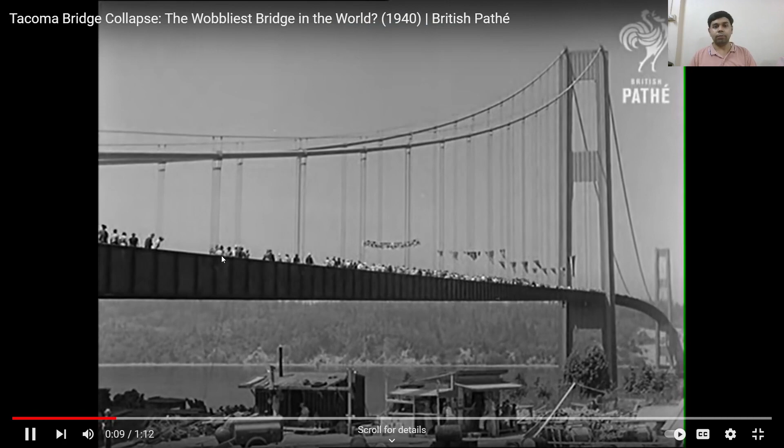Over $6 million. But misfortune overtakes the great structure. These are some of the most amazing pictures ever recorded by a newsreel. The actual collapse of the world's third largest suspension bridge.

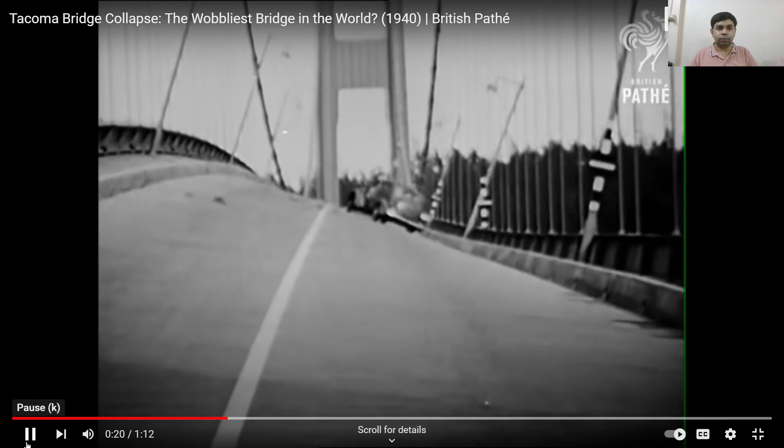So this video explains the Tacoma Bridge. It was one of the largest suspension bridges in the world, around 1940. This is a very old video. There were intense winds which caused the bridge to vibrate and wobble with uncontrolled amplitude. The frequency of the forces acting on the bridge matched the natural frequency of the bridge, and this led to uncontrolled oscillations of the bridge. You can see how large it was.

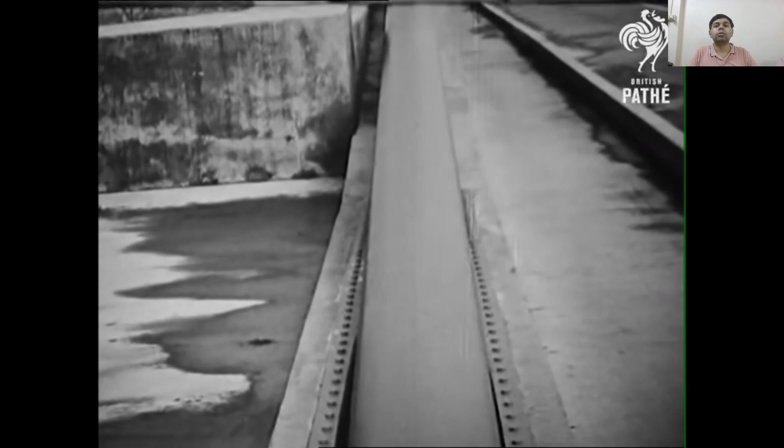Only a 35-mile-an-hour wind is blowing, but this apparently sets up a rhythmic swinging of the bridge, which increases with each swing.

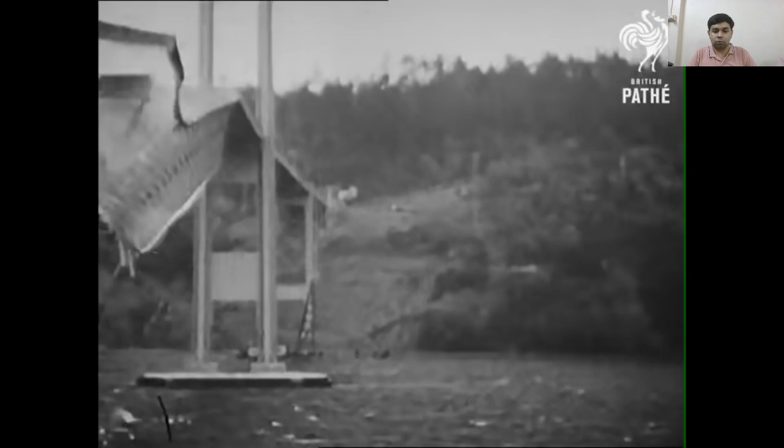Finally, the swinging road and the suspension cables give way and plunge into the water below. Fortunately, the only casualties were a car stalled on the bridge and a dog.

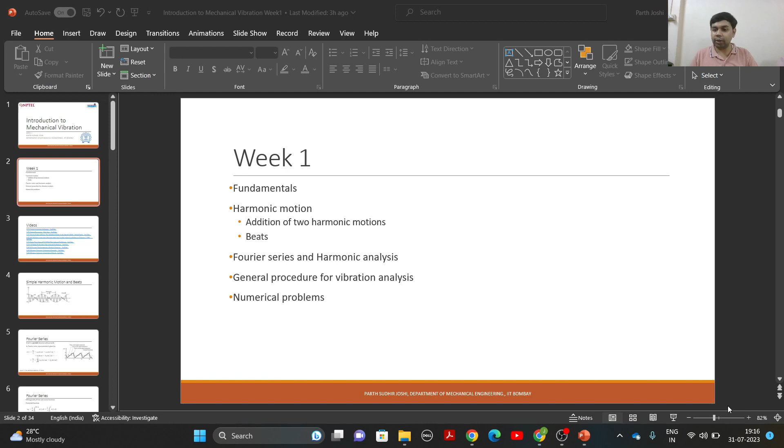So I think all of you were able to at least see the video, right? Yes, sir. Yes.

So the video basically showed how the Tacoma Narrows Bridge collapsed because of the gusts of wind. The video said that the wind was blowing at only 35 miles per hour, which is not a very high speed, but still the wind was enough to cause such uncontrolled oscillations of the bridge, and this finally led to the collapse of that bridge. So this is one of the very famous examples of how resonance can cause damage.

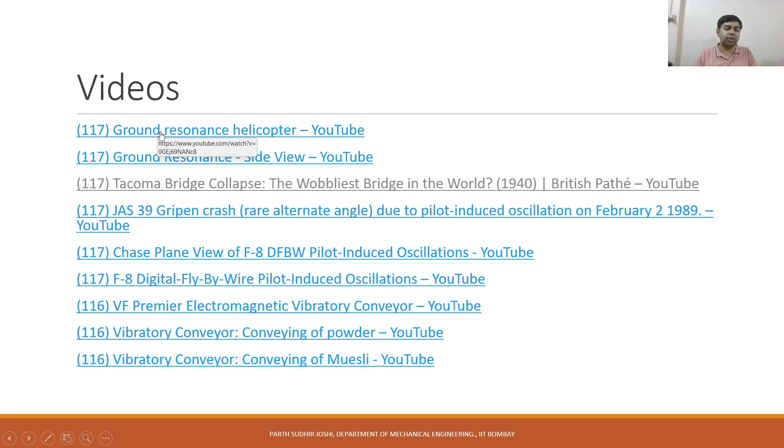Then I would like to show you another example, which is called helicopter ground resonance. So what happens here is there is some eccentricity in the helicopter rotor which leads to a resonance occurring, and we'll see what happens to the helicopter in the video.

So I think all of you could see how the helicopter rotor broke off. So what happened is that it had some kind of eccentricity in the rotor which made an excitation force on the helicopter rotor.

So basically the four blades of the rotor are kind of flexible and they can move about here and there, and if one of the blades deflects slightly because of some wind or some kind of effect, then that causes some eccentric load which acts on the rotor, and then eventually that excitation goes on increasing to such an extent that the rotor can actually break off. So we'll see the same example, I'll just play it again, but this is the side view.

So basically these are also some kind of oscillations which are not desirable. So we'll see another example of a similar kind where we see pilot induced oscillations. So the plane was trying to land, but the controls given by the pilot actually led to some excess pitching up motion, which caused the plane to take off again, even though it was trying to land. So this is another example of pilot-induced oscillations.

So we see that in some cases the oscillations in a system are generally undesirable. So this video and the next video are again similar examples of fly-by-wire pilot-induced oscillations. So you can watch these videos later. I'll be sharing this entire set of slides with you.

So now we'll see another example where we see vibrations being used for some constructive purpose.

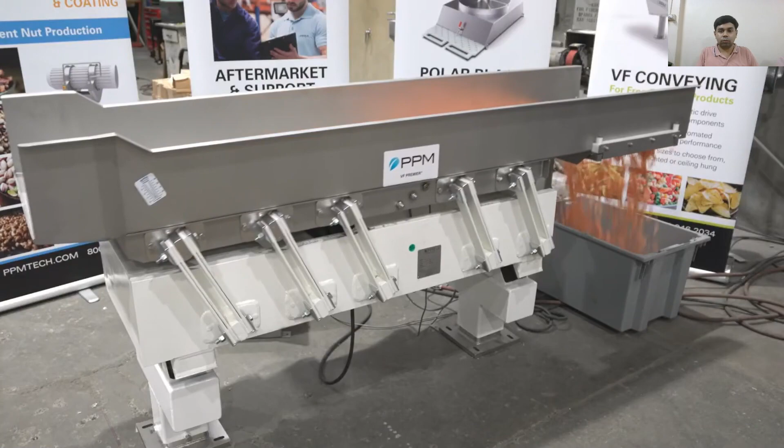So this was an example where we see an electromagnetic vibratory conveyor. So there are some oscillating electromagnetic forces which make the tray vibrate back and forth. And this causes back and forth vibrations because of the electromagnetic forces, and this pushes the things placed in the tray forward. So these vibrations cause the things the tray is carrying to be pushed forward. So this is basically used as a conveyor or feeder in some industries.

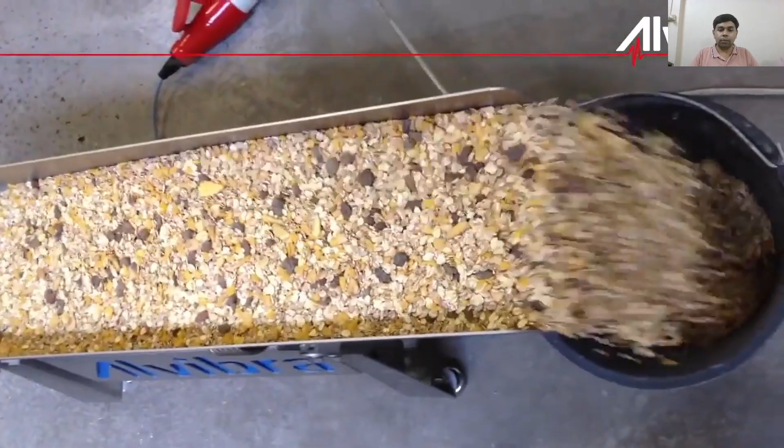So similarly, we can see another example where vibratory conveyors are used. So we can see the tray is vibrating at some very high frequency, so that pushes the things that the tray is carrying forward. So this is where we can see a useful application of vibrations. So these were some examples.

In addition to that, there are also many examples which you can see. You can search on YouTube for vibratory finishing processes, where vibrations are used for grinding or finishing operations in some industries. So there are several examples where vibrations are used in a useful way also.

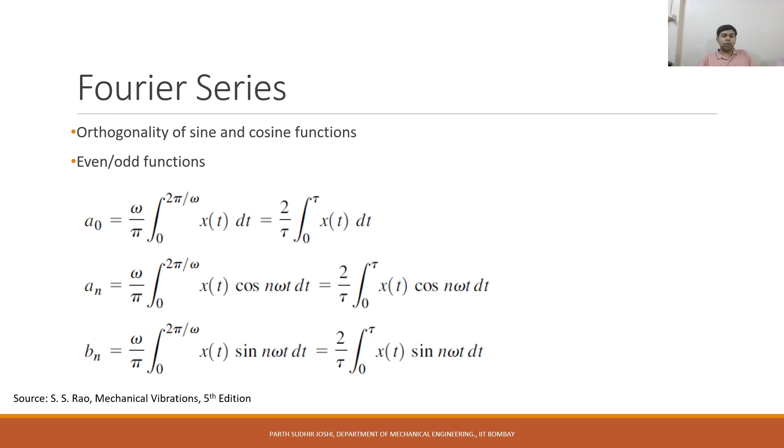Then we come to the general procedure for vibration analysis. The first major step is mathematical modeling. When we want to analyze the vibrations in a system, we first have to express the whole dynamics of the system using a mathematical model. We generally apply Newton's second law to the system, and even before that, we try to find out how much information we have about the system, and based on that, how detailed a model we can build.

Based on the level of information we have about our system, we can build either a simple or a more complex model, which may be linear or non-linear. The complexity of the model will depend on how much information we have and what our interest is. If our intention is just to see the natural frequency, we may not need a very detailed model to capture that characteristic. But if we want a precise response to some excitation, we may need a more detailed model, and for that we will need more data.

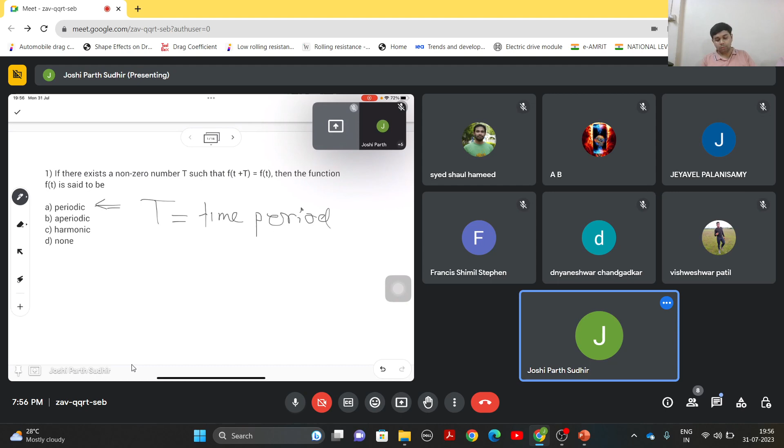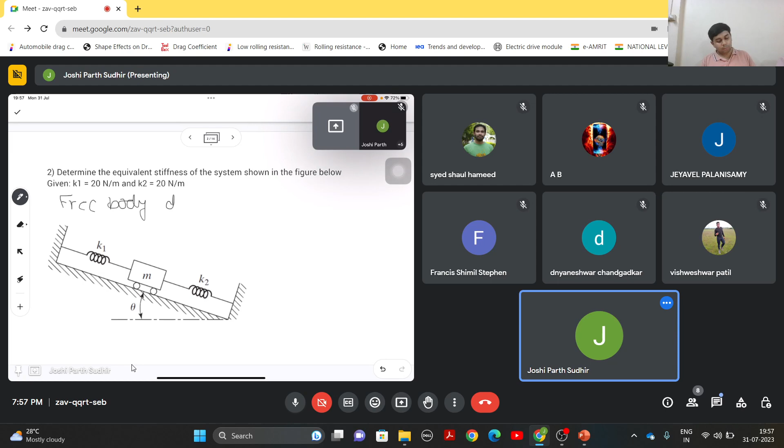Okay, so I'll give you a hint. Basically, we can just draw a free body diagram. One by K1 plus 1 by K2. Okay. Okay, we'll see whether that is the answer.

So if we draw a free body diagram and show the different forces acting on this mass m, we will first show the weight W of the mass, and there will be some normal reaction because of the inclined plane, and there will be some force due to the first spring. Let us say it is tensile. Now if the spring force due to K1 is tensile, then the spring K2 may be under compression, but for now let us assume that this is the direction of the spring force.

Let us say Fs2 is compressive, whereas the spring force Fs1 is tensile. So now if we want to write down the values of the spring forces Fs1 and Fs2 in terms of K1 and K2, we have to consider the displacement of this mass. So let us say the displacement of the mass is x of t.

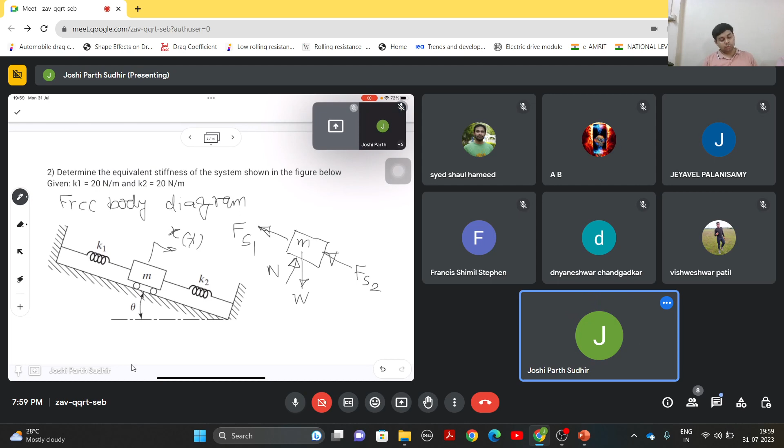Or if we attach a coordinate system over here, with the x-axis along this inclined plane, and this is the y-axis, then the x coordinate is basically the distance of this mass from this surface. So this is x, and so whatever is the displacement of this mass,

if this K1 spring is under some tension, the other spring is subjected to the same kind of compression. So let us say the deflection of spring K1 is delta 1 and the deflection of spring K2 is delta 2; it may be tension or compression. So what is the relation between delta 1 and delta 2? What will be the relation between delta 1 and delta 2?

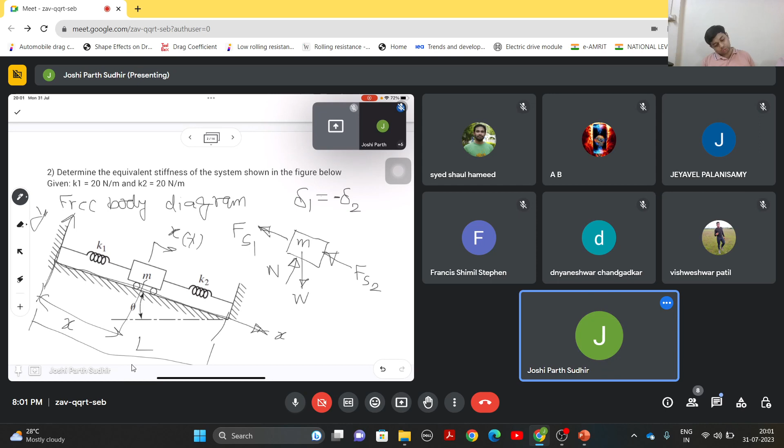Yeah, they will be of opposite signs. So if we call tension as positive and compression as negative, then yes, they will be of opposite signs. So if we have to write down the expressions for Fs1 and Fs2, let us say the distance between these two walls is capital L. Then this will be L minus x.

Right? So let us say the natural length of spring K1 is L1 and the natural length of spring 2 is small l2. Then we can write down the values of the deflections delta 1 and delta 2 using this expression.

Now, this problem as such is very simple for finding the equivalent stiffness, but the steps we are following are one of the most generalized, systematic ways to solve any problem in vibrations. The first step is to choose a coordinate system and attach it so that it is easy to write down the positions of the masses. Since we are dealing with an inclined plane, we can choose a coordinate system along and perpendicular to the inclined plane. That will be easier for us to deal with.

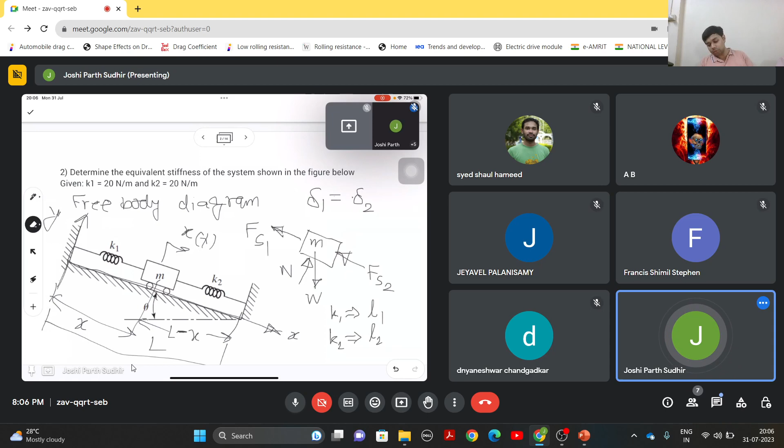Why? Because I have shown the direction in such a way that Fs2 is already compressive. So we don't need to say delta 1 is minus delta 2, because we have already assumed the nature of the forces while showing the direction. So either we assume both are tensile and then write delta 1 is minus delta 2, or we assume the nature while drawing the free body diagram, and then indicate the magnitude of the forces.

So either way, it will be the same thing. Since delta 1 is delta 2, they are equal in magnitude, so we can write basically K1 plus K2 into delta 1. It can be delta 1 or delta 2 because both are equal. This is basically K equivalent into total deflection, delta 1. So we can say that K equivalent is equal to K1 plus K2.

The springs are actually in parallel, so that's why the stiffnesses get added up. The K equivalent will be K1 plus K2, not 1 by K1 plus 1 by K2. They are not in series, they are in parallel, because the deflection values are the same and the forces get added up. Whereas in springs in series, the forces acting on the springs are equal and the deflections get added up to get a total equivalent deflection. There the equivalent spring stiffness is different.

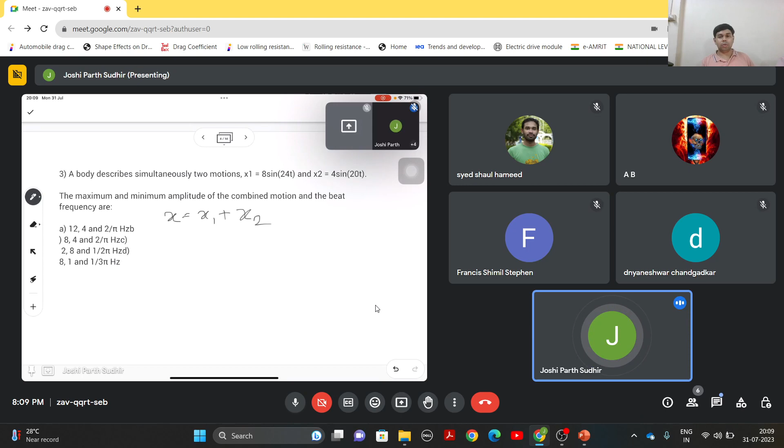Shaul Hameed sir has said that the option is A. So we'll see what we get.

So to find out the frequency of beats, we basically do omega 2 minus omega 1 divided by 2 pi, or mod of that. So mod of 20 minus 24 by 2 pi, which is 4 by 2 pi, which is 2 by pi. So the frequency of beats will be 2 by pi.

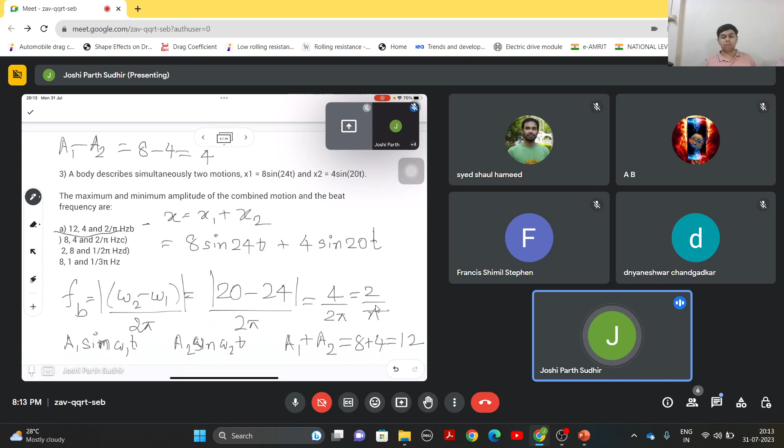So before we proceed, any questions or any doubts till now? Okay. So let's move on to the next question.

The next question is about a cantilever beam made of an alloy with a given modulus of elasticity, loaded transversely at its free end. The length of the beam is given, and the beam has an annular cross section with given inner and outer diameters. The problem is to find out the stiffness of this beam.

So let us draw a diagram of this setup. Let us say this is the cantilever beam, and there is a load applied transversely. Transverse means basically perpendicular to the axis. Let us call that load P, and let's say the length of this beam is capital L, and the cross section of this beam is annular.

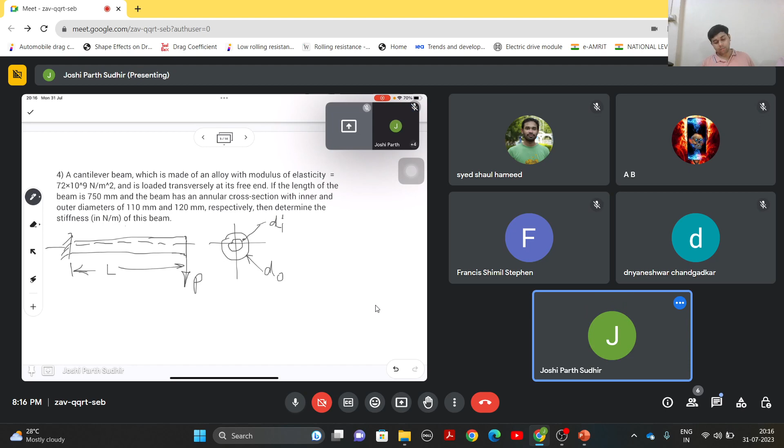Let us say the inner diameter is di and outer diameter is do. So this is the overall setup. di and do are given. We have been given the length, and the modulus of elasticity E is also given to us. E is basically 72 gigapascal.

L is given to be 750 mm. Di is 110 mm and Do is 120 mm.

So now if we want to write down an expression of the deflection of the tip of this cantilever beam, so if you want to find out basically the deflection of the tip of the cantilever beam, what is generally the expression for the deflection? So let us say we call delta as the deflection of the tip. So the deflected shape of the cantilever beam will be somewhat like this.

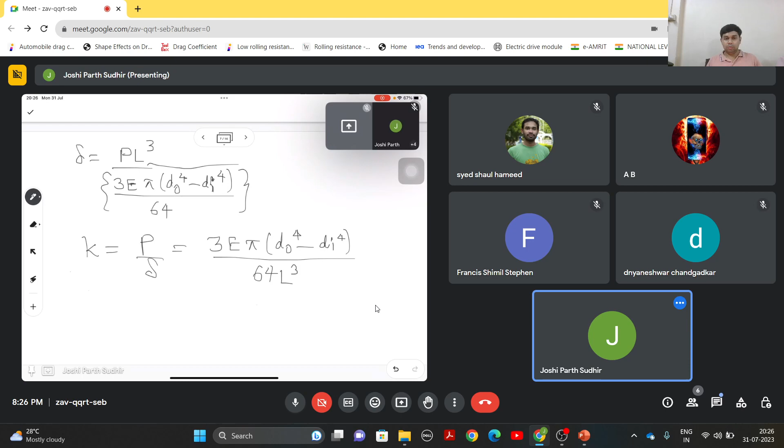So any doubts till now? Okay. So shall we proceed?

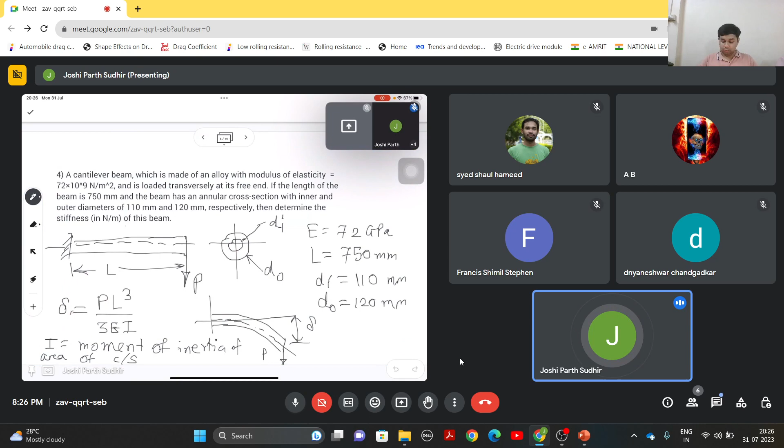So we can just plug in the values. E is 72 gigapascal, the outer and inner diameters are 120 and 110, and length is 750 mm. So K will be basically 3 into ... outer diameter is 0.12 to the power 4 minus 0.11 to the power 4, in terms of meters, so we'll use SI units, and the length is 750. So we will get the answer in Newton per meter.

So can someone please quickly calculate the numerical value of K?

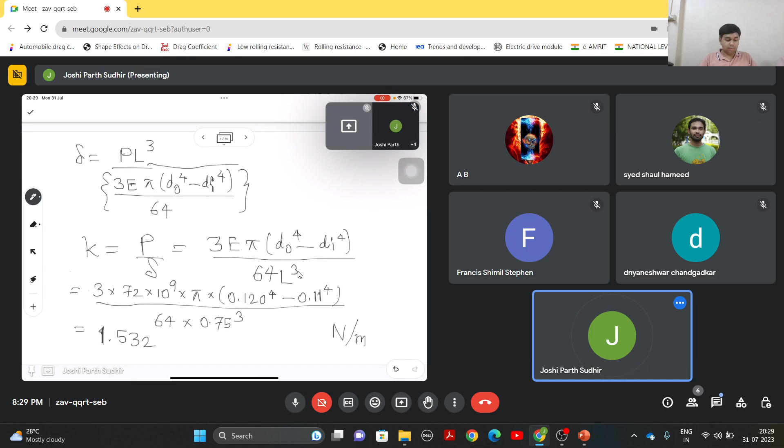So the next question is about harmonic motion. It is given that the harmonic motion has an amplitude of 0.01 meter and it has a frequency of 10 hertz. It is asked what is its period, maximum velocity and maximum acceleration. So it is given that there is some harmonic motion. Let us say we write down the function x of t. It is of the form a sine omega t plus phi.

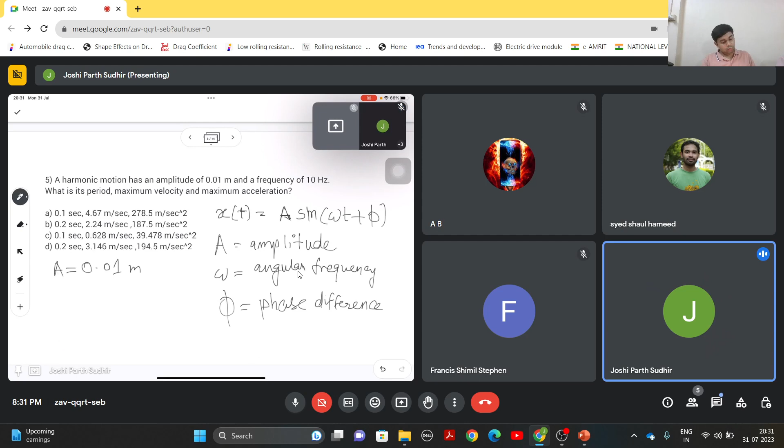Where a is basically the amplitude, omega is basically the angular frequency, and phi is basically the phase difference. So we have been given that the motion has an amplitude a, so a is 0.01 meter, and it has a frequency of 10 hertz. So omega is 2 pi into frequency, so it's 2 pi into 10, or 20 pi radians per second.

So the time period T is basically 1 by frequency, or 2 pi upon omega. So it's 1 by 10, which is 0.1 seconds. So that is the time period. Now to find out the maximum velocity and the maximum acceleration, what we will do is differentiate this expression with respect to time.

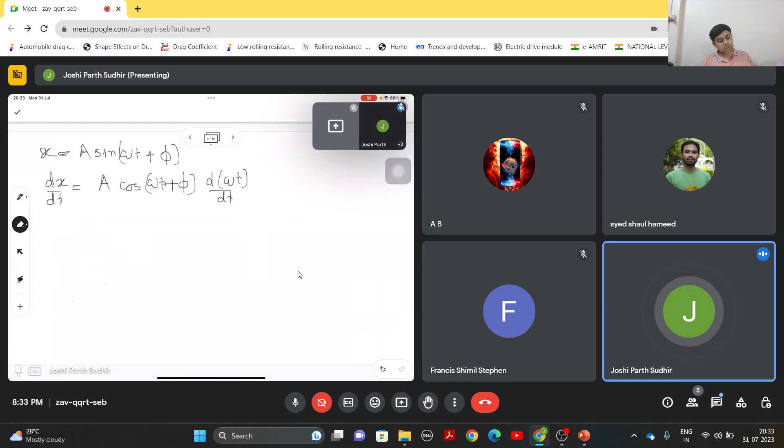So x of t is, let us say, a sine omega t plus phi. Then dx by dt will be what? Because a is a constant, it will be a into the derivative of sine of omega t plus phi, which is cos of omega t plus phi into the derivative of omega t with respect to time. This is based on the chain rule of differentiation. So it will be a omega cos omega t plus phi.

And similarly, if we differentiate this expression further with respect to time, d2x by dt2 will be, since a omega is a constant, minus sine omega t plus phi into the derivative of omega t with respect to t, which is again omega. So it will be minus a omega square sine omega t plus phi.

So the maximum value of the velocity is basically a omega. So dx by dt, its maximum value will be a omega, and the maximum value of acceleration will be a omega square. So that will be the magnitude of maximum velocity and maximum acceleration.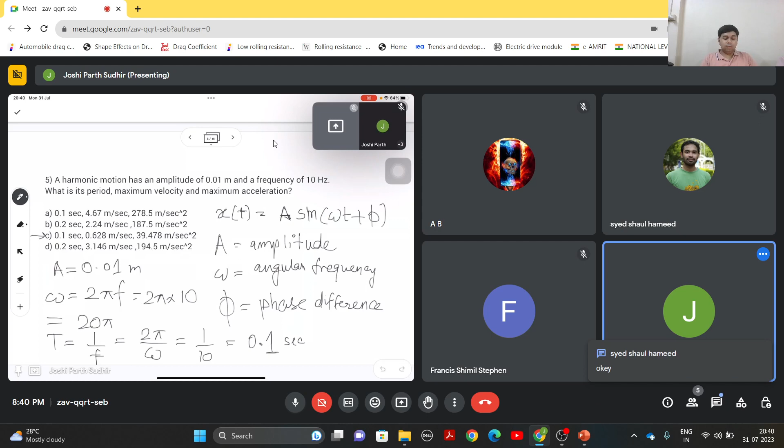Okay. Any other doubt? If not, then we'll just proceed with the next problem.

So in this problem, it is given that the displacement of a particle, it undergoes a simple harmonic motion, where y is basically the displacement in centimeters and t is the time. And the question is to find out the maximum acceleration of the particle in centimeters per second square.

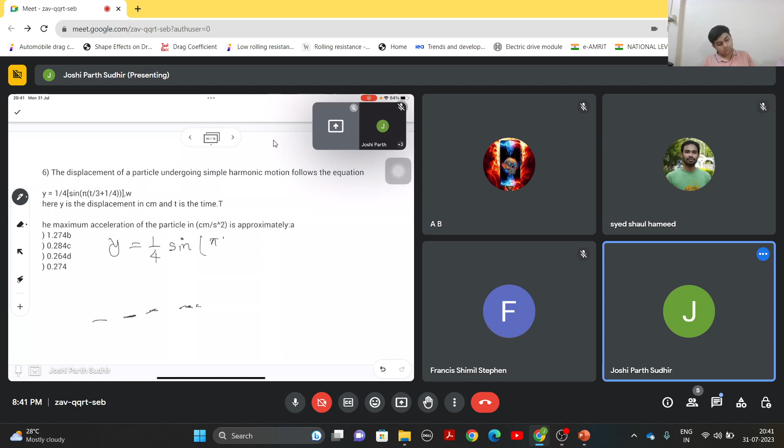So here in the question there is some misalignment of the ABCD options, but the options are not important. What is more important is the question. So y is basically 1 by 4 sine(pi t by 3 plus pi by 4).

So if we compare it with the standard form, A sine(omega t plus phi), then here amplitude is 1 by 4, omega is pi by 3, and phi is pi by 4.

So just now we saw that the maximum acceleration is amplitude into omega square, which is 1 by 4 into pi by 3 whole square, so pi square upon 3 square, which is basically pi square upon 4 into 9.

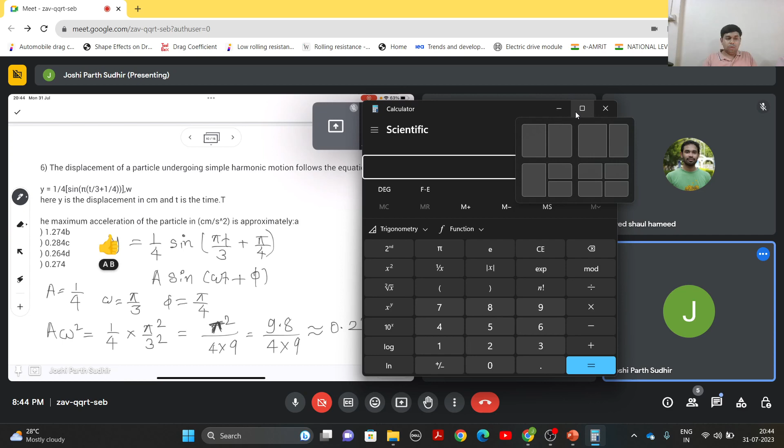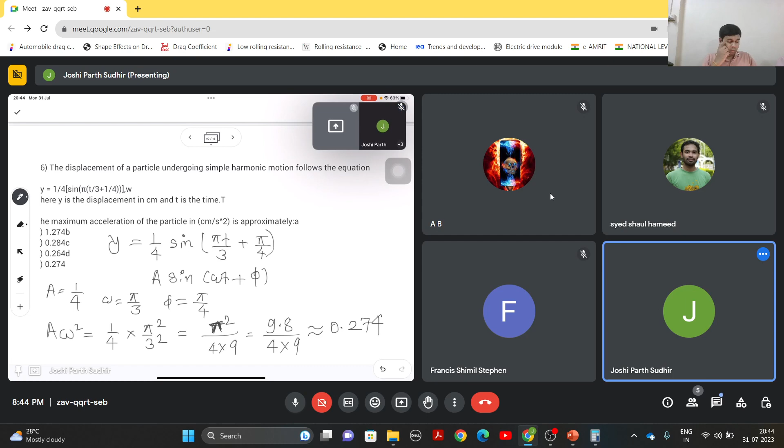So the value of pi square is approximately something around 9.8, so it will be approximately something around 0.26 or 0.27. So just check that. Yeah. So it's I think around 0.274 or something. Yeah. So that's the answer to this question. So this was very similar to our previous question.

Yeah. So now we come to this question of finding equivalent stiffness. It is given that two springs having stiffness of 18 Newton per mm and 12 Newton per mm are attached in series, and a mass is suspended at the end of it. We have to find out the equivalent stiffness of the two springs. So first let's draw a diagram of this setup.

So let's label this spring as K1 and this as K2. So now since these springs are suspended in series, to find the equivalent stiffness, I think most of you would be knowing the formula. But how do we get that formula? So we'll just see that quickly.

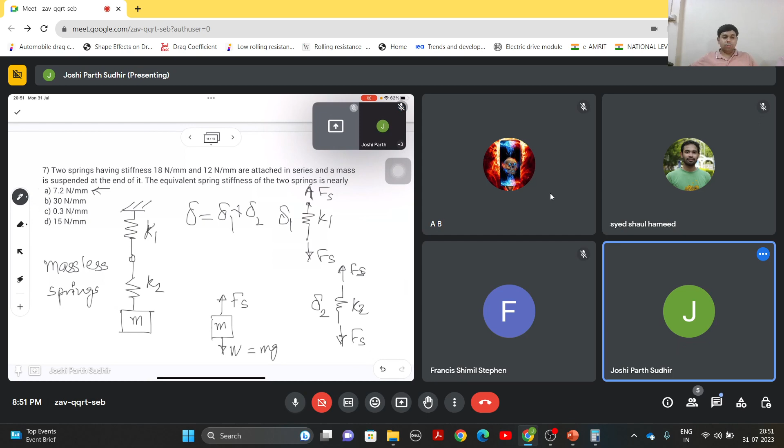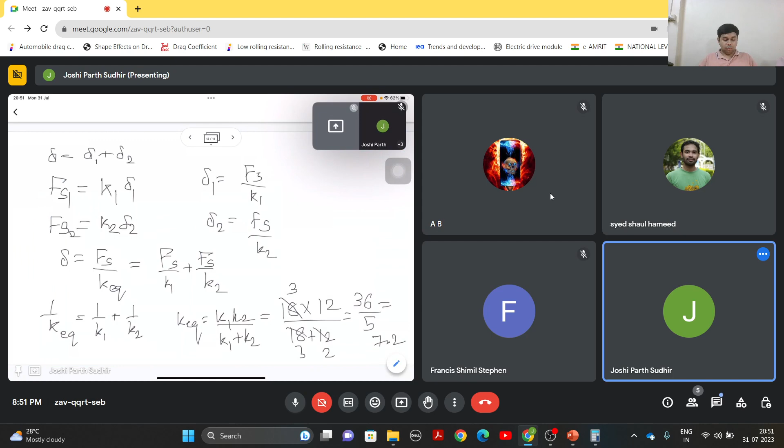So these were the set of problems that I had which are similar to our assignment. So these were the set of problems which I had taken out for this particular week.